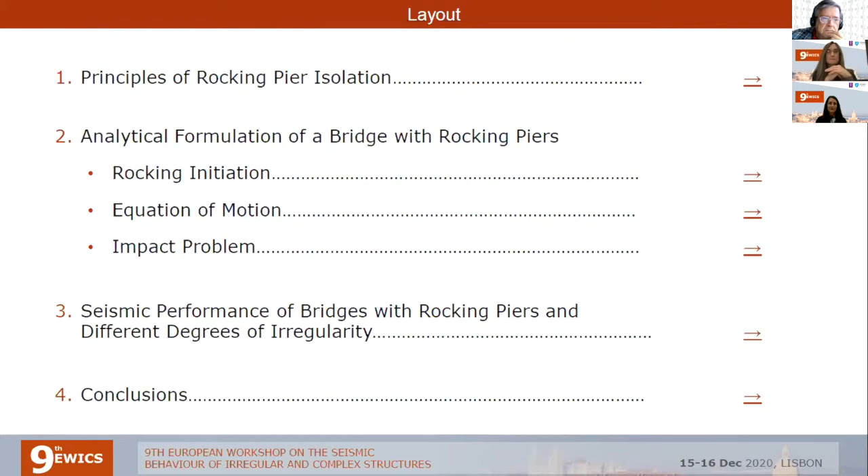To begin with, the concept of rocking pier isolation, although proposed quite recently as a promising alternative for earthquake-resistant bridges, dates back to ancient times, when builders without the ability to construct integral joints used rocking surfaces between adjacent members. Two characteristic examples are Stonehenge in the UK and several ancient temples in the Mediterranean, like the Temple of Apollo in Greece.

The structural advantages of these configurations that allowed them to withstand the test of time are mainly two. The first is their negative stiffness, so in principle resonance is not possible to occur, but practically this is also not feasible to happen, as shown in previous studies. The second is that the restoring mechanisms derive from the physical properties of mass and mass moment of inertia.

From the analytical point of view, the first to examine a rocking structure analytically was Housner in 1963, who examined a freestanding rocking block. Five decades later, Makris and Vassiliou presented the corresponding frame system, a regular rocking frame with columns of same section and height. A few years later, Dimitrakopoulos and Giouvanidis presented the corresponding irregular configuration, consisting of two piers of same section but different height.

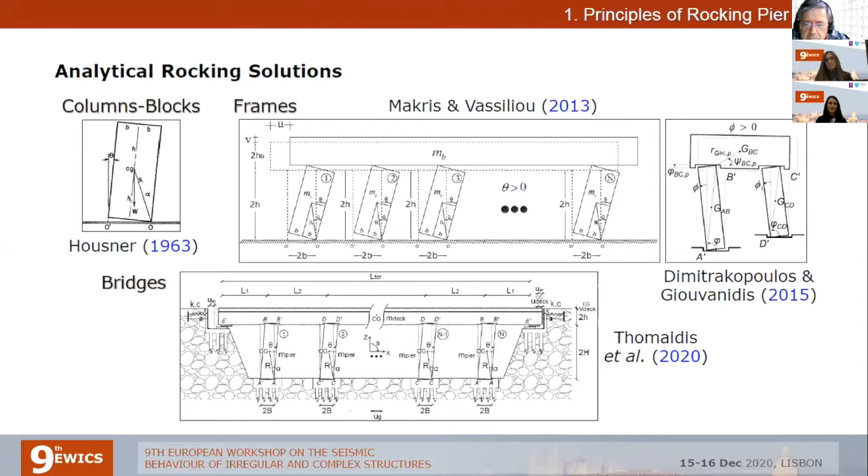Quite recently, we presented the corresponding regular bridge with rocking piers that takes into account the contribution of the abutment backfill system through a spring and dashpot element working in parallel at both ends, as well as additional parameters like the joint gap between the abutment back wall and the superstructure, and different span arrangements for a more realistic bridge configuration.

Today I'm going to present the corresponding irregular system that consists of two rocking piers of same section but different height, and takes into account the effect of the abutment backfill system. In order to formulate the movement of this bridge structure, some assumptions need to be made: first, we ignore the deformability of all structural members, and second, we don't expect sliding effects at any instant.

To describe the rocking motion of this configuration, three conditions need to be described. The first is rocking initiation, or when does the system enter rocking motion. The second is the equation of motion, or what happens as soon as rocking motion has started. The third is the impact problem, describing what happens when the bridge returns to the at-rest position, impacts at the corresponding pivot points, and reverses the rocking rotation to the other direction.

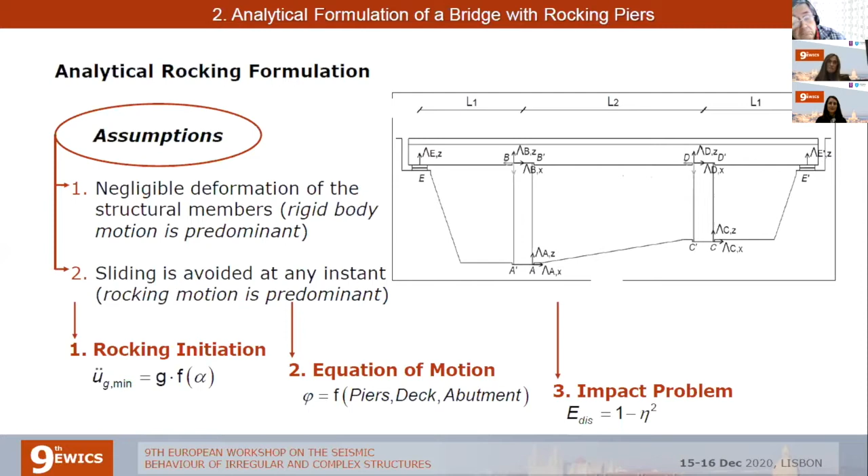In the following slides, I will present these three conditions with emphasis on the difference between the regular bridge structure and the irregular one. For rocking initiation, the application of virtual work results in an equation where the minimum ground acceleration capable of inducing rocking motion equals a constant lambda times the gravitational acceleration times tangent alpha, where alpha is the slenderness of the rocking piers.

For the regular system, lambda is equal to 1, so the expression describing rocking initiation is quite simple. On the other hand, for the irregular system, lambda has a more complex form, and in addition there is a double sign formulation indicating that the ground motion capable of inducing rocking motion needs a different value depending on the direction of the movement.

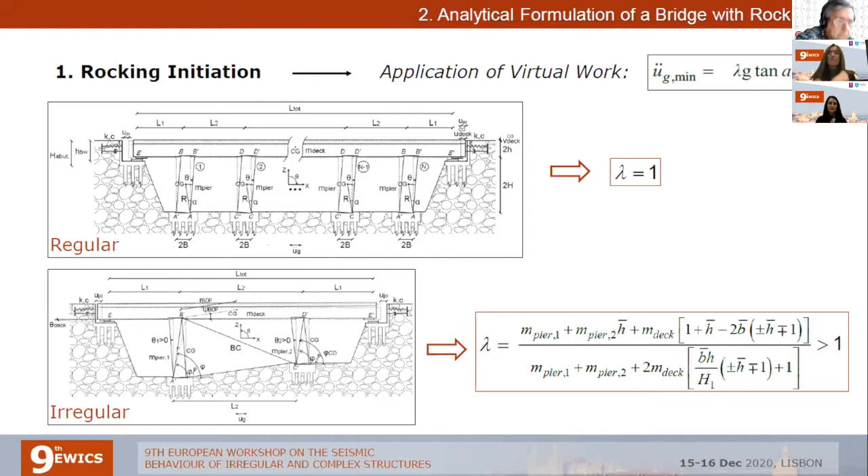On the bright side, though, the equation of lambda for the irregular system is greater than 1. That indicates a delay in the initiation of rocking motion for the irregular structure compared to the regular one.

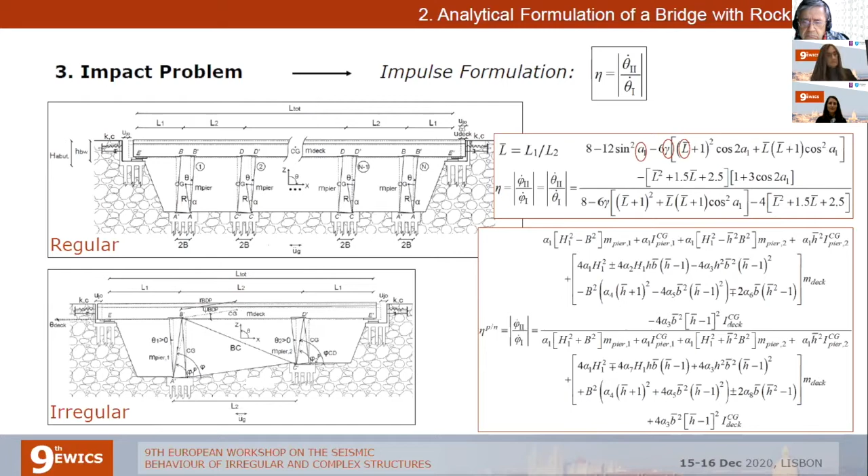On the other hand, the corresponding expression for the irregular system is much more complex, way too long for the system. There is also a double sign formulation which explains different attenuation of motion when the rotation changes from counterclockwise to clockwise and vice versa.

So overall, although the irregular system shows higher complexity in terms of the dynamics, it insinuates from some parameters higher stability, greater seismic performance.

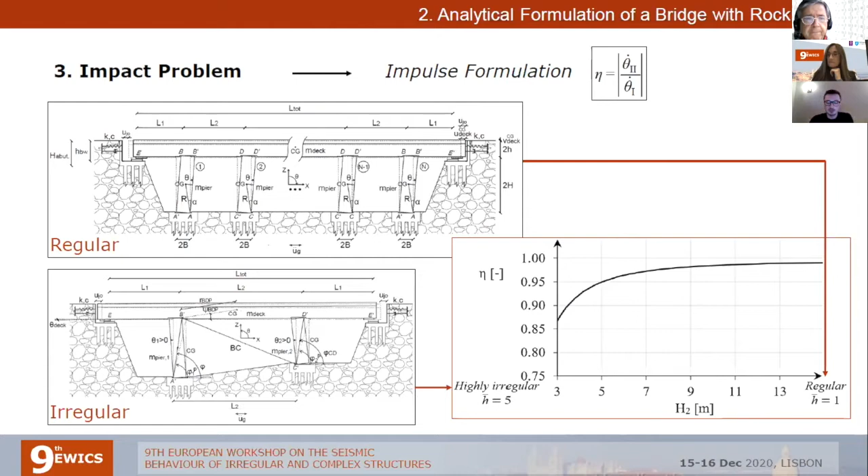Now, the seismic performance is examined with emphasis on different degrees of irregularity. 3 different bridge structures are examined. In all these 3 configurations, the superstructure and the abutment backfill contribution is the same, and we only change the substructure.

Specifically, we examine 2 rocking piers for the regular system with same height of 26 meters, and we decrease the height of one of the 2 piers in order to have a moderately irregular system and a highly irregular system, respectively. The seismic performance is examined with 10 artificial ground motions that match the Eurocode 8 spectrum with PGA 0.6G.

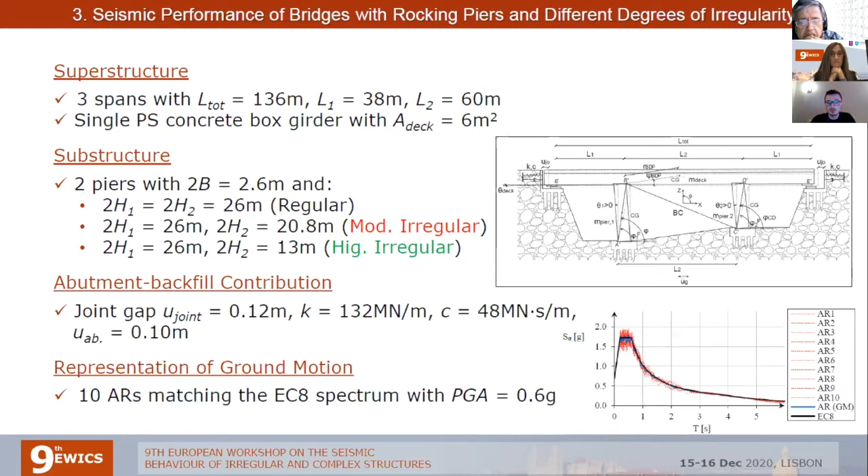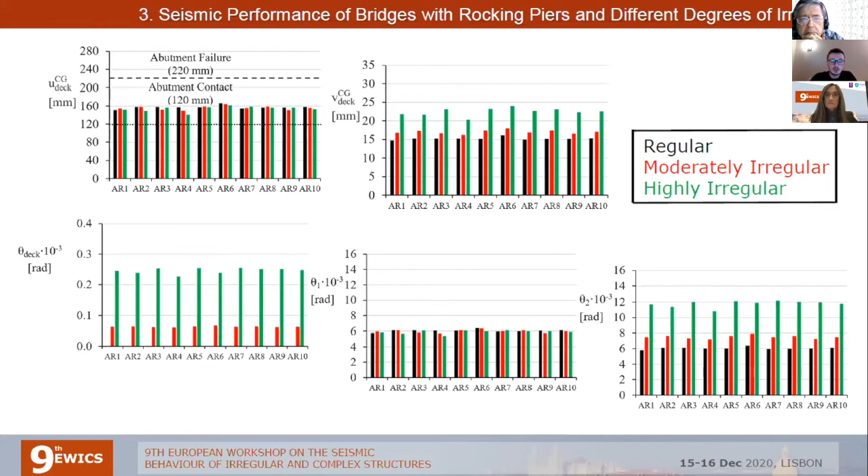To sum up, from the dynamics point of view, the equations are much more complex for the irregular configuration. However, this is not reflected in a corresponding finite element numerical analysis, while the simulation that will be followed will be pretty much the same for a regular and an irregular system.

But the irregular configuration shows delayed rocking initiation, higher contribution of the abutment-backfill system, and higher energy dissipation at its impact at the rocking interfaces.

With respect to the seismic performance, the activation of the predominant failure mode of the system is not affected by irregularity, but the irregular structures experience a different rotation of the rocking piers and different uplift, leading the superstructure to rotate and therefore uplift more compared to a regular system.

To close, it should be noted that all the rocking configurations survived strong ground motions of PGA 0.6G with a reserve capacity of 50%, which is quite high.

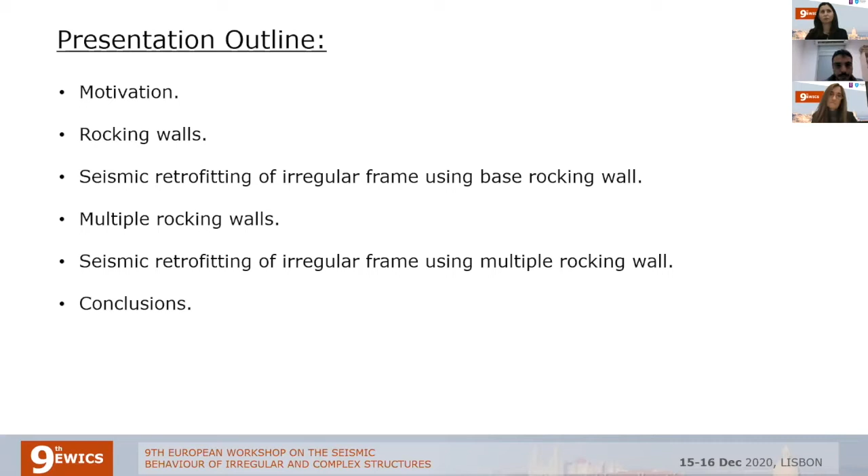Today it's common to design buildings to dissipate seismic energy based on plasticity of the primary structural elements. This plasticity means large damage, which in turn causes a large economic loss after the seismic event.

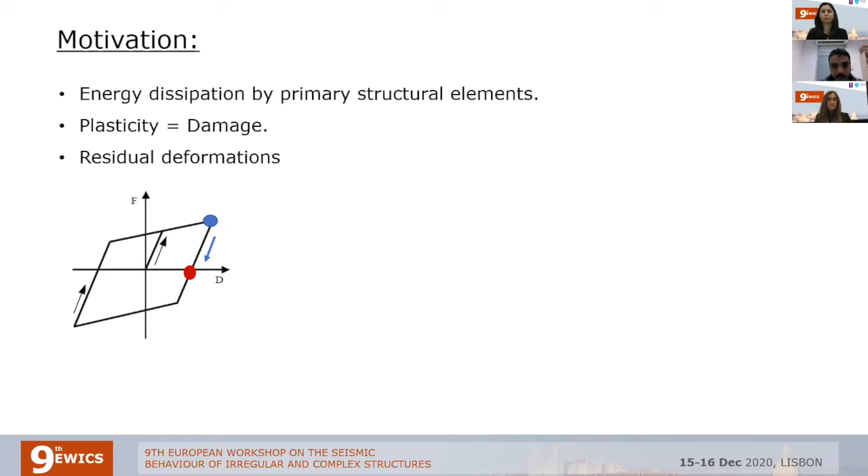If we look at the force deformation curve schematically shown in the figure, we know that if we reach the plastic deformation, then removing the load will cause large residual deformations. The problem with these large residual deformations is that they are very hard to fix, and sometimes it's impossible or economically prohibitive.

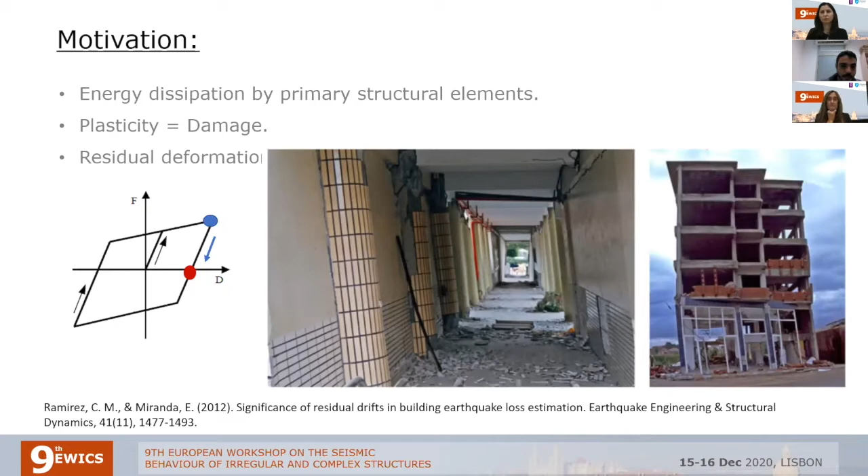So to solve these problems, self-centering systems were proposed. The advantage of these systems is that they can significantly reduce the residual deformations. In addition, they can be designed such that the energy dissipation is achieved by designing special devices that are located in previously known locations in the structural system.

The force deformation behavior of these systems is referred to as flag-shaped behavior, shown schematically in the figure. The special thing with this force deformation curve is that it passes through the origin, or in other words, zero force gives zero displacement.

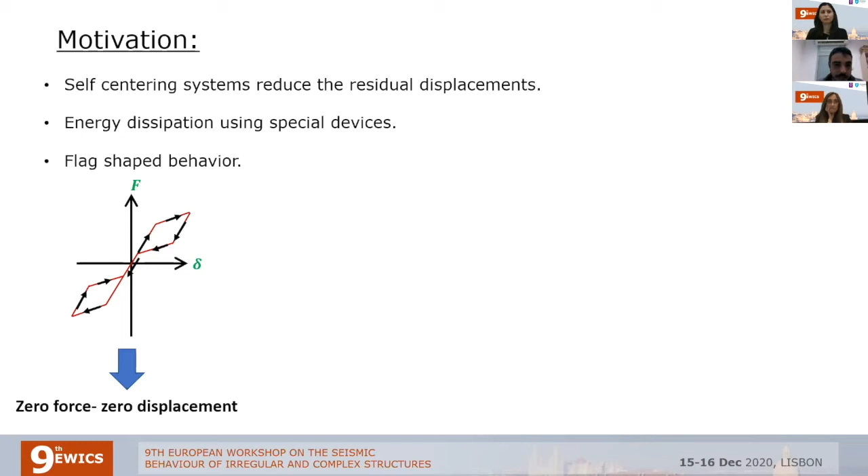Several types of systems were proposed to achieve this type of behavior. This includes rocking walls or rocking concentrically braced frames, which at the macro level behave the same, post-tensioned frames, and systems that use special self-centering devices.

The advantage of a rocking wall is that it has a large lateral stiffness, which for irregular or frame structures helps to regulate the interstory drift along with the building height.

The concept of rocking walls: if we look at the behavior, it's a combination of two behaviors. The first one is the rocking itself plus the pre-stressing tendon, which gives elastic nonlinear behavior.

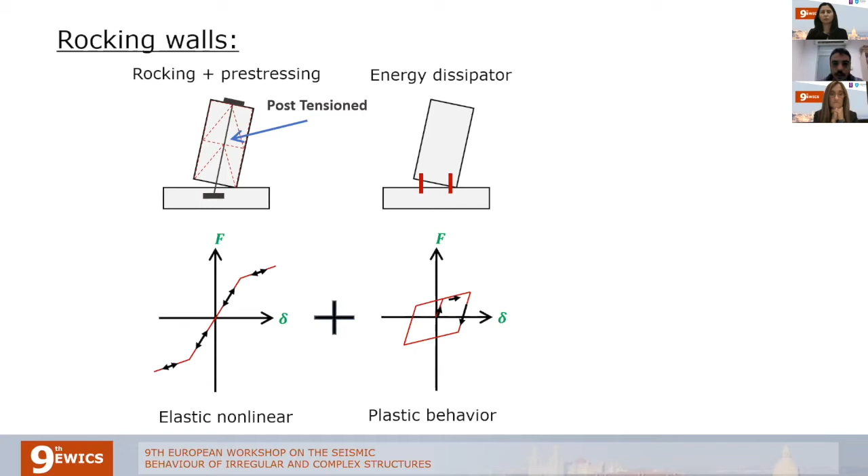We add to this energy dissipation from the energy dissipation device. If we combine these two behaviors and tune them correctly, we can potentially achieve the desired flag-shaped behavior.

In this study, we will use a rocking wall in order to retrofit an irregular steel moment resisting frame. Then we will add the multiple rocking solution in order to reduce the demands on the rocking system.

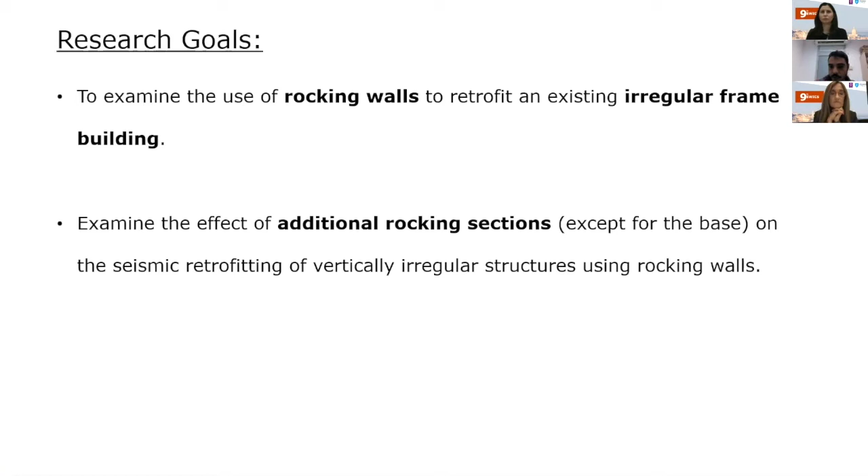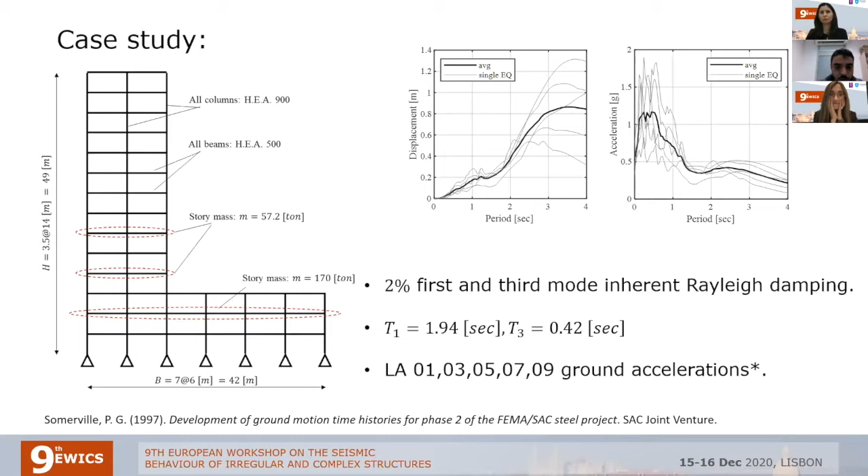The first natural period of the structure is 1.94. The analysis of the frame was conducted using the finite element software OpenSees, using nonlinear beam and column elements modeled with the fiber element section method with 5 integration points along each member. P-delta effects were also considered, along with elastoplastic behavior with 0.5% hardening.

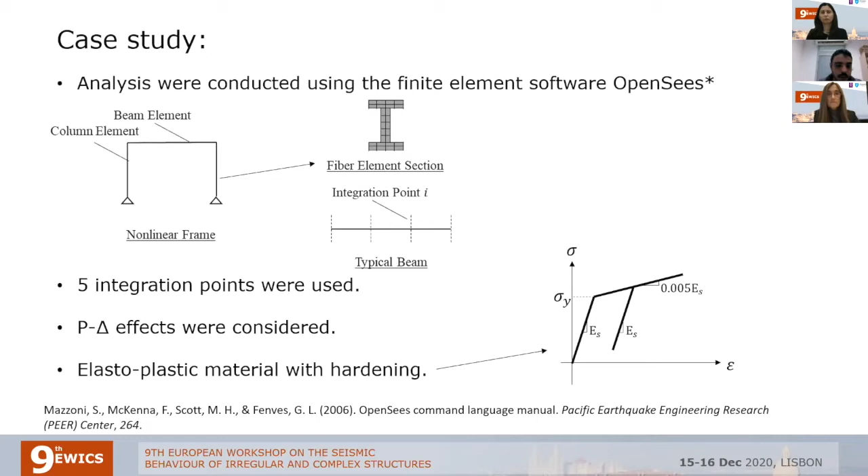The bare frame results show large interstory drifts, presented here along the building height. Each gray line represents the results for a single earthquake, and the average is represented by the black line. The red dashed line represents the setback level.

In addition, if we look at the roof displacement, we can see that the residual displacements in this case are about 30 centimeters, giving an inclination angle of 0.006 or more, where previous studies have defined an allowed inclination of 0.005.

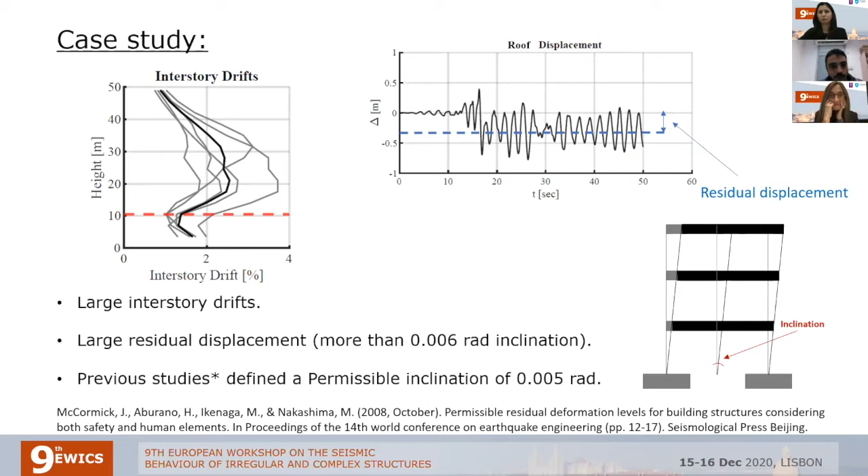So in order to reduce these residual displacements and interstory drifts, we have added a rocking section to this frame. The rocking section of the rocking wall was designed using a reduction factor of approximately 6. Other reduction factors were considered, but this value gave the best results in terms of residual deformations.

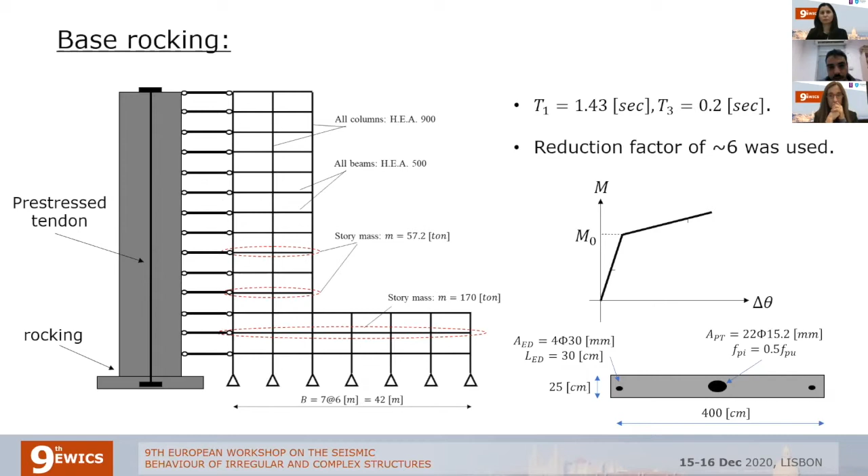The natural period of the building slightly decreased because we added stiffness to the building. The model of the rocking wall is presented here in the figure.

The results of the structure retrofitted with a base rocking wall are presented here in this slide.

The left figure shows that the interstory drifts were highly regulated along with the building height, and they are significantly reduced. The middle figure shows a reduction in the residual displacements. There are still some residual displacements which are caused by the nonlinearity of the existing frame itself.

The right figure here shows the peak moments at each section of the added rocking wall, and we see that these moment demands can be large along with the structure height. So we are interested to reduce this moment envelope.

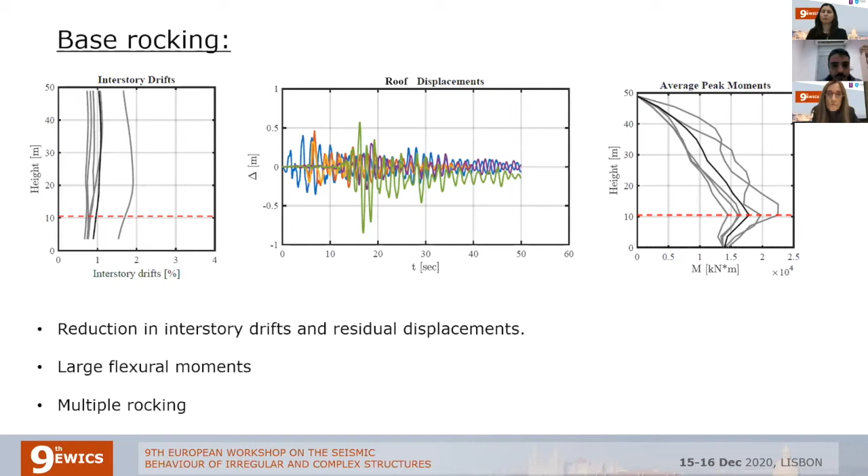So if we add another rocking section along with the building height, additional to the one located at the base, we can reduce this moment design envelope. And with this, we get increased interstory drifts.

So to design this type of system in order to retrofit our irregular frame, we ask ourselves where to locate the additional rocking section, and in addition, which decomposition moment to design for. The decomposition moment is the moment at which the rocking behavior starts.

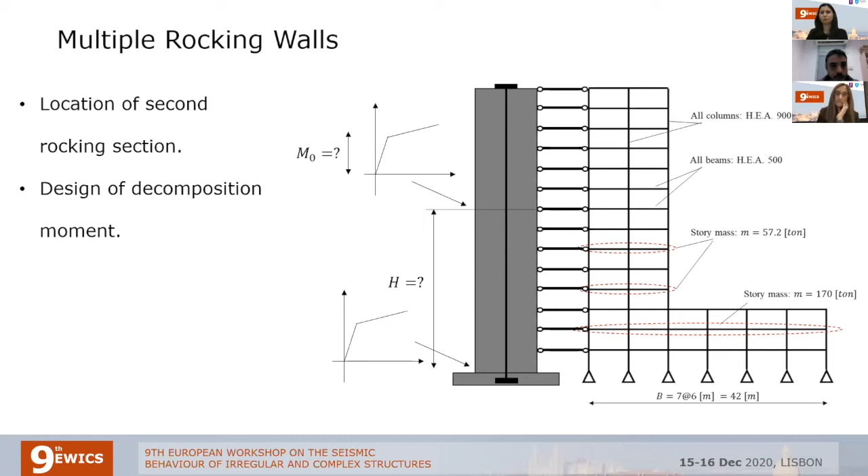So we have conducted a parametric study where each combination of these two parameters was subjected to nonlinear time history analysis, as explained before, and the results are presented here in the contour maps.

The left figure here shows the maximum interstory drifts of the multiple rocking system normalized with the bare frame. Just for reference, the results for the base rocking system show a value of 0.43, which says that the multiple rocking solution always increases the displacement as we expected before.

The vertical axis here represents the additional rocking level, and the black line represents the setback level of the building. The horizontal axis represents the ratio between the top to base decomposition moments. The right figure shows the volume of the moment envelope.

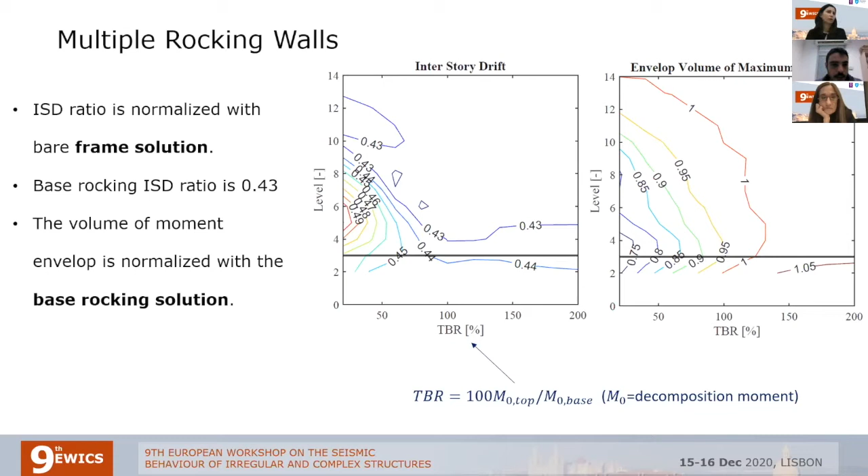And we have selected the marked point here to examine the behavior of this system. This point represents a rocking wall with two rocking sections, where the second one is located at the setback level, or at the third level of the structure.

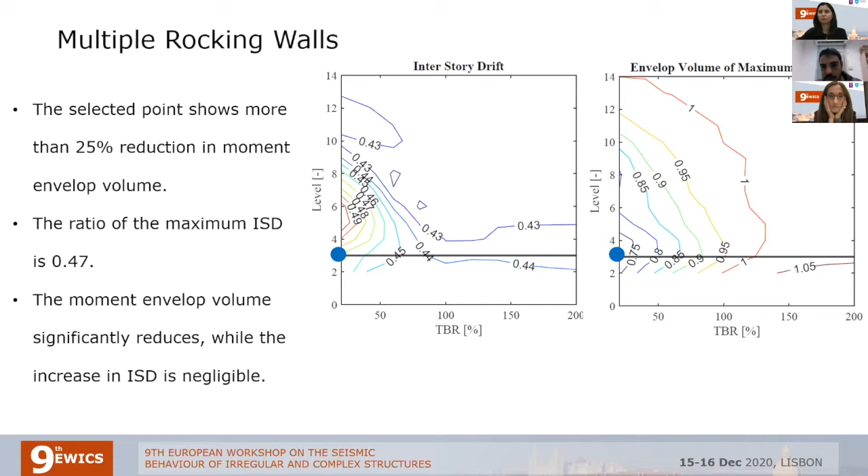As we see here, the reduction in the moment envelope volume, shown in the right figure, can be significantly reduced, while the interstory drifts, as we see in the left figure, are slightly increased.

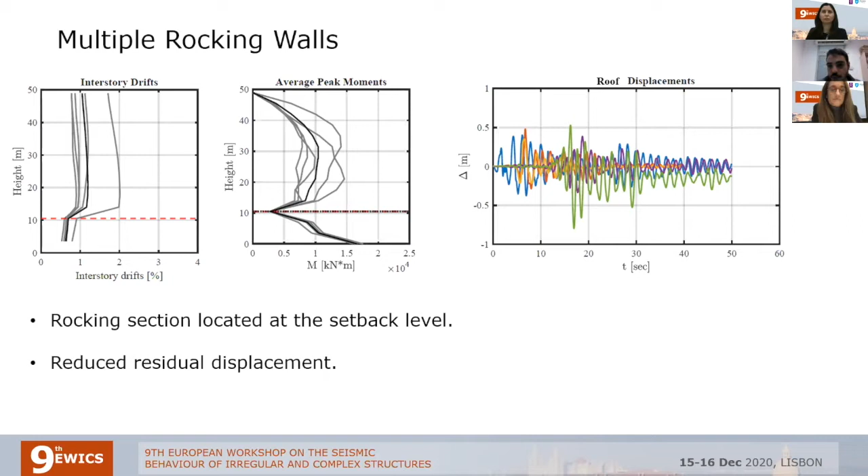The response of the selected points is shown here for interstory drifts, average peak moments, and roof displacements. What's interesting here is that the roof displacements, the residual deformations, are similar to those received with the base rocking solution.

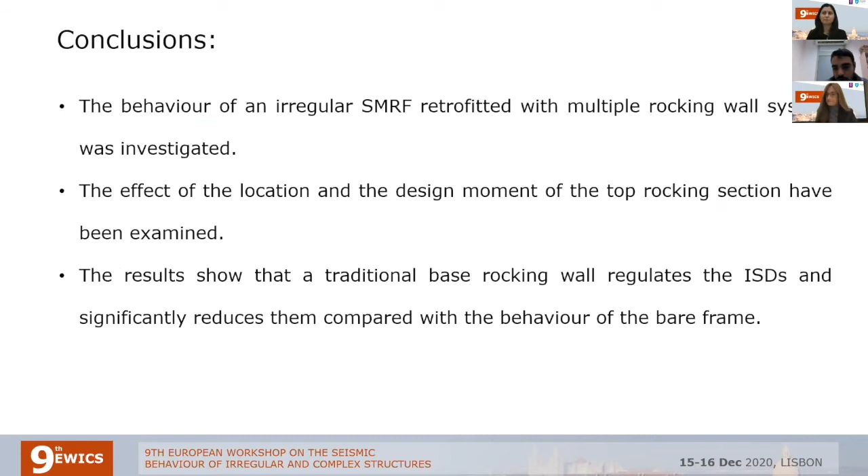So to conclude, the behavior of an irregular steel moment resisting frame with a multiple rocking wall system was investigated. The effect of the location and design moment of the top rocking section have been examined. The results show that a traditional base rocking solution regulates the interstory drifts and reduces them, and adding a rocking section at a higher level could potentially reduce the bending moment envelope.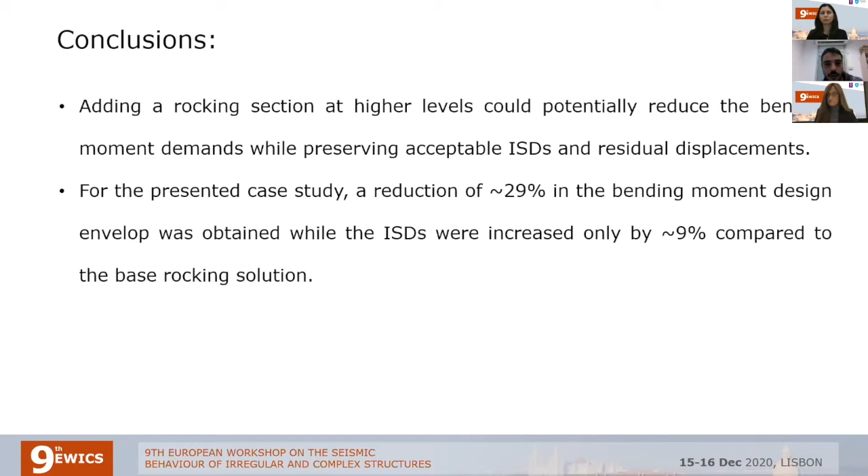In the presented case study, a reduction of approximately 29% in the bending moment design envelope was achieved, while the interstory drifts were increased by just approximately 9%. Thank you for your attention.

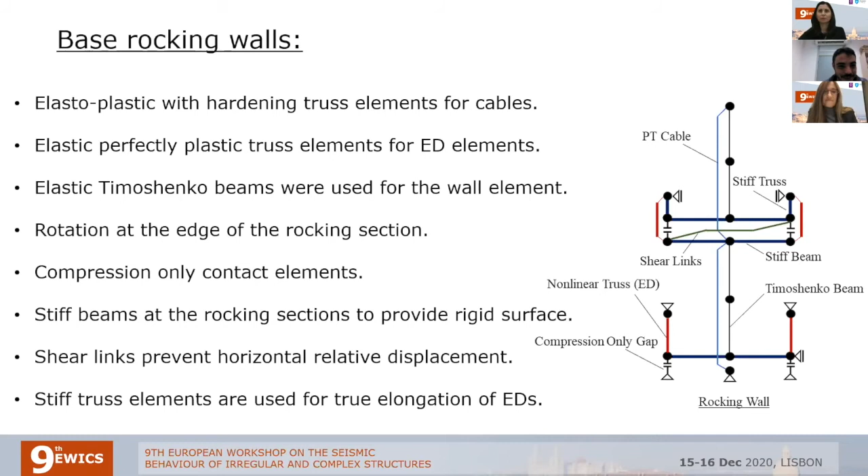I'm going to present the work of our master student, Seismic Retrofitting of Irregular Mixed Masonry Reinforced Concrete Buildings in Lisbon. There are four types of old masonry buildings in Lisbon: pre-pombalino, pombalino, gaioleiro, and mixed masonry reinforced concrete buildings, which will be the case study I'm going to present now.

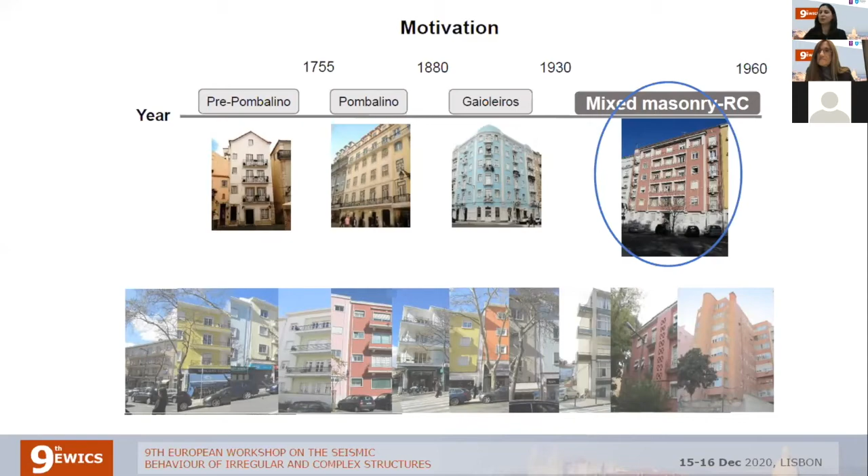As we can see here, this is the area where these buildings are located in Lisbon. The area is called Alvalade, and it represents 62% of the building stock in Lisbon of all masonry buildings. In these buildings, reinforced concrete was introduced for the first time. And then, as all old masonry buildings, they were built without using any seismic code.

After some analysis, we concluded that they have a high level of degradation and deterioration of structural materials, and due to the fact they're still used for housing and services, some seismic risk analysis at the territorial scale should be performed, and eventually after that, some appropriate strengthening techniques should be proposed.

In total, there are around 1,300 mixed masonry reinforced concrete buildings in this Alvalade neighborhood. We analyzed about 43.3%. And after analysis, we concluded that they have very low resistance to seismic action, and most of them show heavy or very heavy damage.

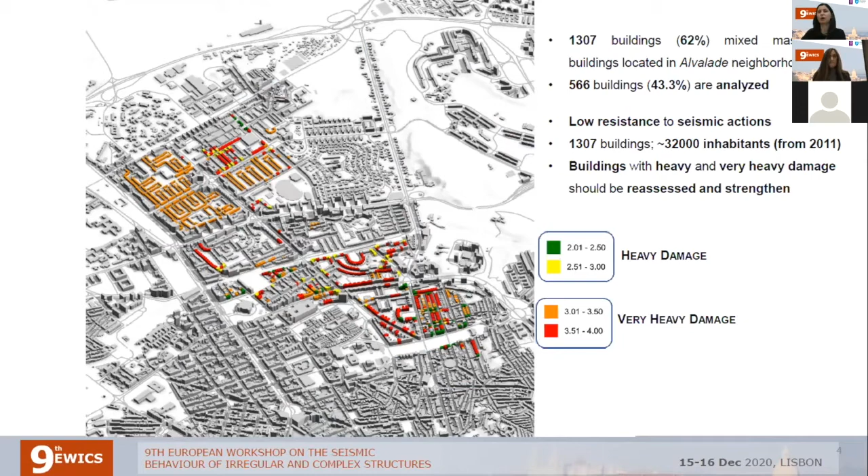We chose to analyze the most representative buildings of this typology, analyzing buildings located in aggregate due to the fact that this is a more realistic case than analyzing only isolated buildings. These buildings have irregularities in plan and height.

They have 4 levels. External walls are built with reinforced concrete structures filled with bricks. Internal walls have solid and hollow brick with cement mortar. Facade and interior walls, as I already told, have different thickness along the height of the building.

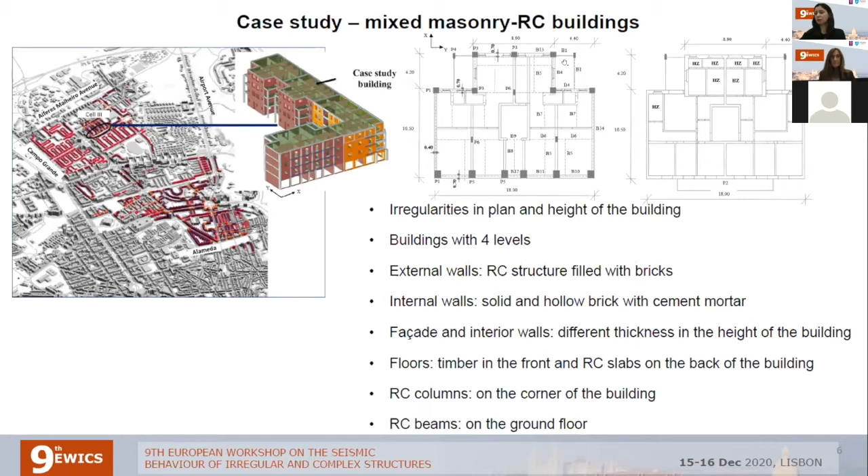This building has 2 types of floors: a timber floor in the front of the building, and reinforced concrete slab on the back. Also, they have reinforced concrete elements on the corner of the building and along front and back facade, and reinforced concrete beams on the ground floor.

We performed non-linear static analysis, and the numerical model was defined in Tremuri program based on equivalent frame model approach. In this case, we analyzed only assessment of the global seismic response because we suppose that reinforced concrete ring beams, which exist in these buildings, prevent local response, but this should be analyzed in the future.

Walls are discretized by a set of panels, piers and spandrels, and non-linear response of masonry panels were modeled by non-linear beams with multilinear constitutive law. Reinforced concrete elements are modeled with non-linear beams with strength criteria according to Eurocode 8 and Italian code, and floors were modeled as anisotropic membrane finite elements.

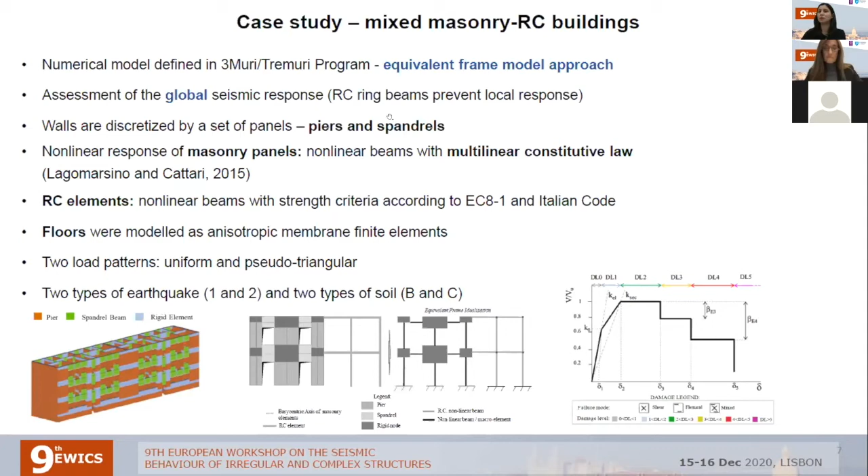We consider 2 load patterns, uniform and pseudo-triangular, and 2 types of earthquakes, as suggested in the Portuguese National Code, and 2 types of soil, B and C, since these buildings are located in these 2 types of soil.

Target displacement of structure is computed from the intersection between the capacity curve and response spectrum that represents the seismic action. Seismic demand for Lisbon is defined with a 475 year return period, and structural safety is verified when the ratio between ultimate and target displacement is higher than 1.

As you can see here on this graphic, for the y direction and uniform load pattern, this criteria was not satisfied. So some strengthening techniques should be proposed.

Here I have presented some damage patterns where we can see that in masonry piers we have mainly flexural damage, and in masonry spandrels we have shear damage. Also for reinforced concrete columns we have flexural damage, and shear damage for reinforced concrete beams, with damage level mainly between 2 and 3, and 3 and 4 in masonry elements.

In this graphic, we can see that the global behavior of the building is influenced by the pushover curve from the walls on the back of the building. This is due to the irregularity of this building on the back, due to some torsional effect.

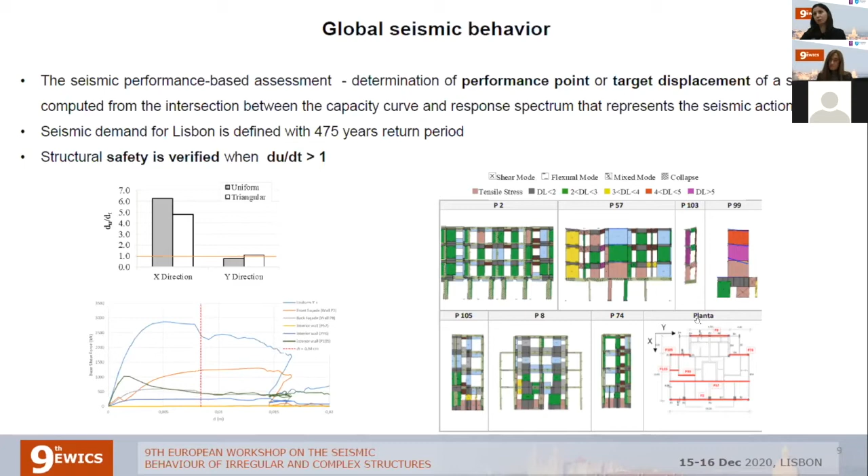After analyzing this pattern and after we saw that criteria are not satisfied, we propose some strengthening techniques. In total, we proposed 12 retrofit scenarios. I'm going to present 4, which are the most relevant and effective.

One of them was strengthening with carbon fiber mesh applied on both facade and some interior walls where extensive damage was observed, mainly at damage level higher than 3. Then strengthening of the staircases with carbon fiber mesh, while keeping reinforcement of the facades.

In terms of reinforced concrete elements, we performed strengthening of the corner columns and columns at the ground level of the main facade with metal angles, and the most damaged beams at the ground level with metal sheets, and strengthening of the columns and beams on the ground floor by

carbon fiber sheet confinement. In all scenarios, we made connection between walls, interior and exterior, due to the fact that this building has very bad connection between these walls.

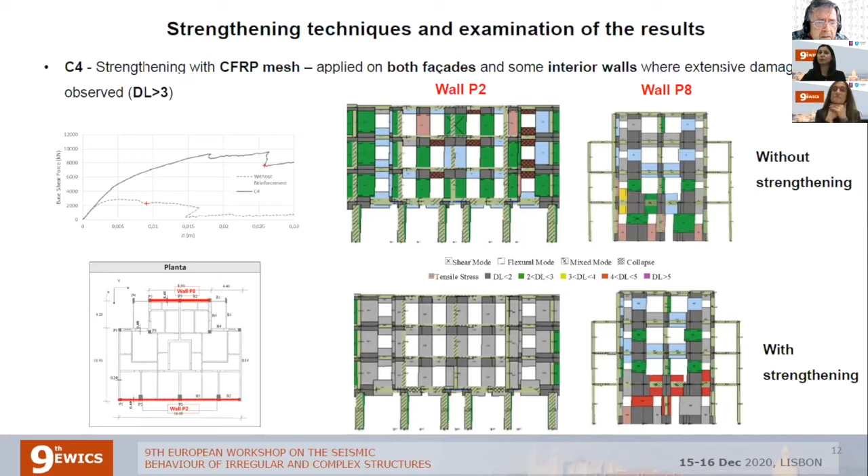This is the strengthening technique applied on both facade and some interior walls, carbon fiber mesh. As we can see, we were fully able to remove damage from the masonry piers, and also from reinforced concrete for some upper floors. But we can see here that with this strengthening we have some very extensive damage on the back facade of the building. This is actually caused by torsional effect due to the irregularity of the building, and due to the fact that we put reinforcement on the main facade, increasing its resistance, causing this effect.

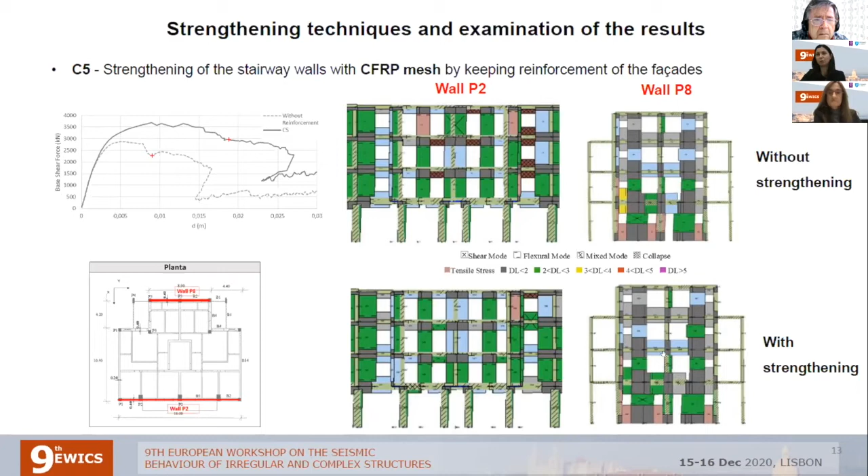Then we decided to strengthen these staircases with carbon fiber mesh, but also keeping the reinforcement of the facade. In this case, as we can see, we managed to solve these problems. We don't have this extensive damage anymore. We have damage between 2 and 3.

The next strengthening technique we perform on reinforced concrete elements is metal angles on the most damaged columns and metal sheets on the most damaged reinforced concrete beams. Here we can see that we managed to solve the problem on some reinforced concrete columns on the ground floor and also on the upper floors.

Also here we had shear damage for this wall P8 on the back of the building. Now we managed to solve this. We don't have any more.

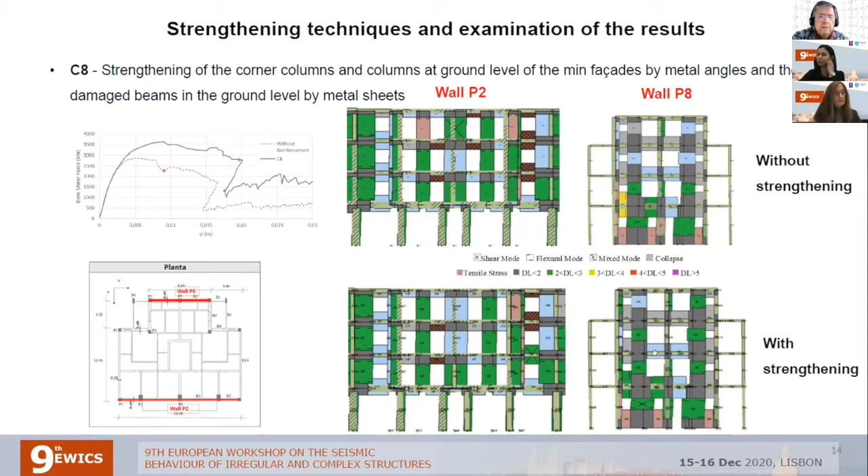Just a short conclusion: after applying all these reinforcement techniques, overall structural safety of the building was always satisfied, avoiding the global collapse of the structure. The observed damage level was always mitigated.

The recommended solution always depends on a cost-benefit analysis, which we are going to do for the research in the future. One of the most appropriate recommendations should target the minimization of torsional effects due to the irregularities found in the back facade.

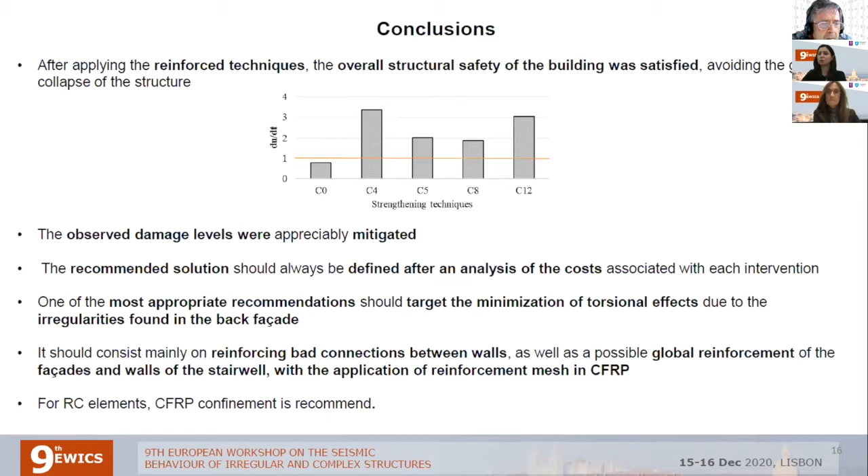It should mainly consist of reinforcing the connection between walls, which is really important, as well as possible reinforcement of the facades and walls of the staircases. In terms of reinforced concrete elements, confinement with carbon fiber sheets is recommended.

Thank you very much for your attention.

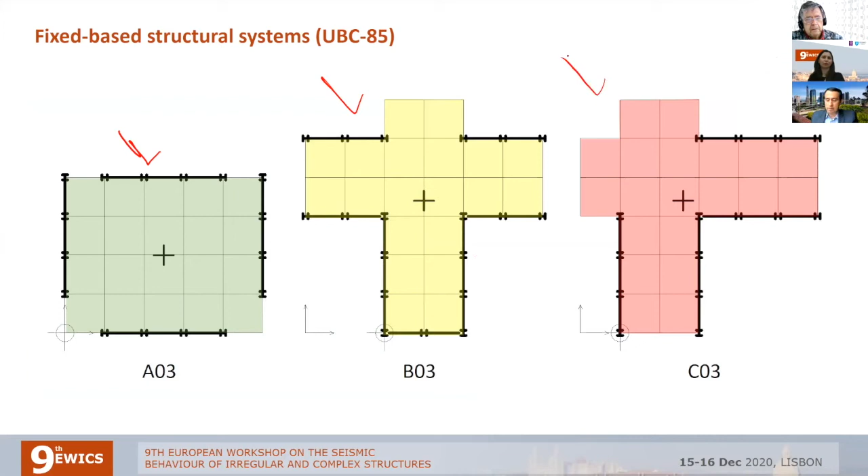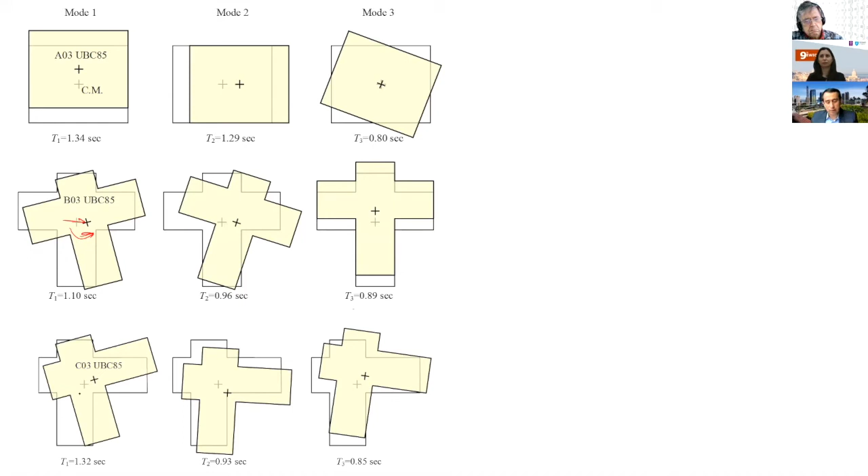As expected, the first mode of the rectangular plan is in the main directions of the building, but for the other plans, the first mode shows some coupling between torsion and translation in the horizontal direction. For the other building plan, we have coupling in both the X and Y directions with torsion.

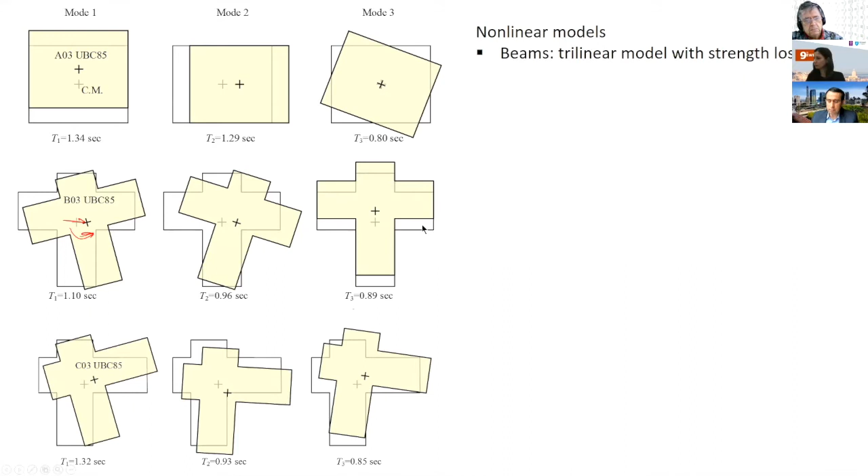The nonlinear model we built for these buildings was based on a trilinear model with strength loss for the beams. For the columns, we use PMM interaction using plasticity theory. Since these are steel buildings, we also need to model the panel zones at the intersection between beams and columns using trilinear models with strength loss.

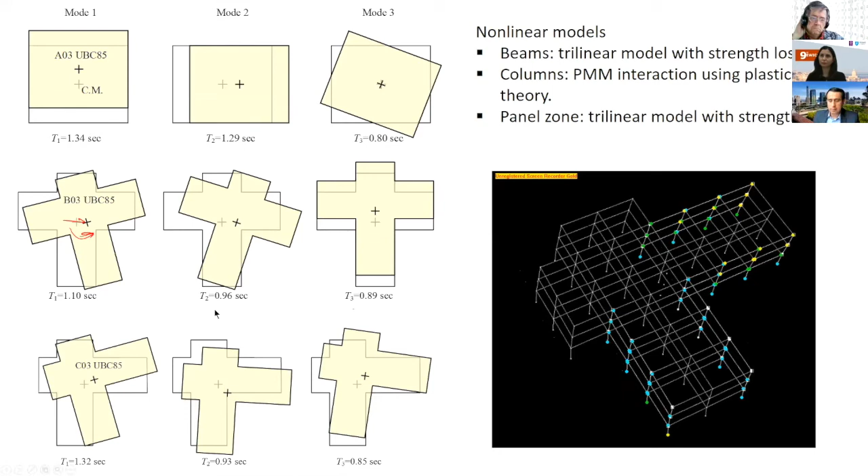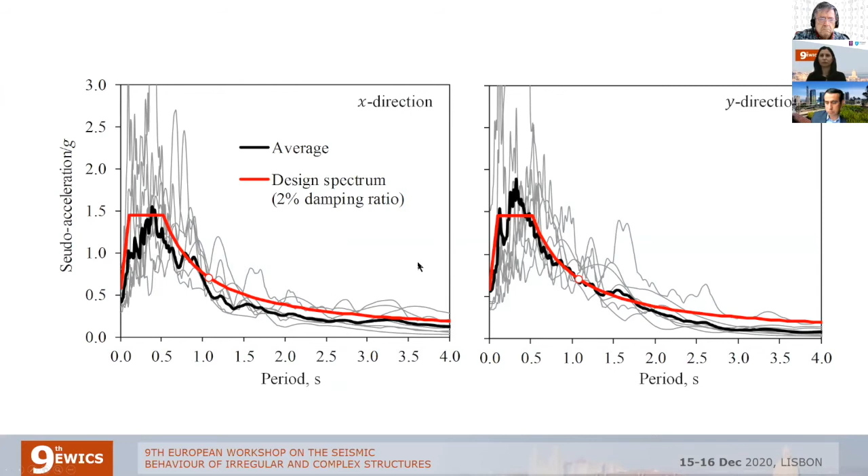So then we designed the isolated building. The design was based as a retrofit, since we want to retrofit these buildings that were designed with an old code using this technique.

For the building, the final devices had 50 centimeters of diameter. The thickness of rubber were 12 layers, totaling 20 centimeters. Period of the isolated building is 2.6 seconds, and the bearing displacement is 0.30 for the design spectrum shown before. For this design, we did the design for a base shear ratio, base shear between the fixed base and the isolated, of between 3 and 4.

This is important because later I'm going to show that the effectiveness of the system is going to be decreased because of the highly irregular plan that this building had.

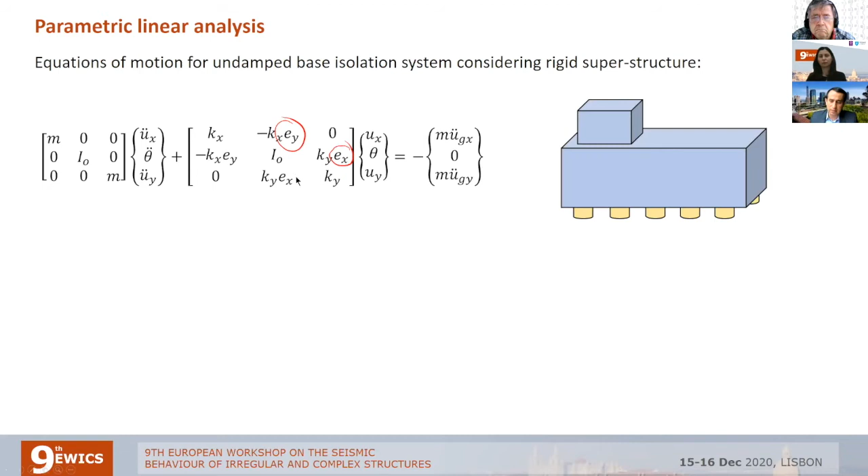These eccentricities are usually equal to zero for a regular plan building, but for a highly irregular plan building like these ones, we could eventually have some isolators with larger stiffness so we can generate some kind of eccentricity to compensate for the torsional behavior of the building. So this is kind of the model we did first, very simple.

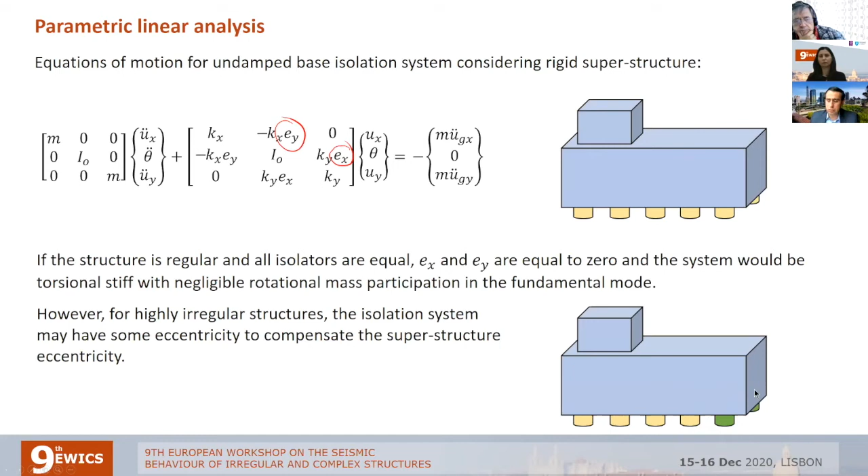So for regular buildings, these eccentricities are zero. For highly irregular buildings, we try to compensate the torsion of the superstructure using different stiffness for the isolators at the base, so we can get an optimum eccentricity.

But when you try to do this in practice, it's kind of difficult. So to make this simpler, we decided to use all the isolators equal in all the columns of the building.

So here I'm comparing the response of the base isolated building with the response of the fixed base building. In this video, you can see that the fixed base building has a lot of very high velocities and high displacements, and the isolation system reduces those along with the damage of the building, but still you see some vibrations in higher frequencies.

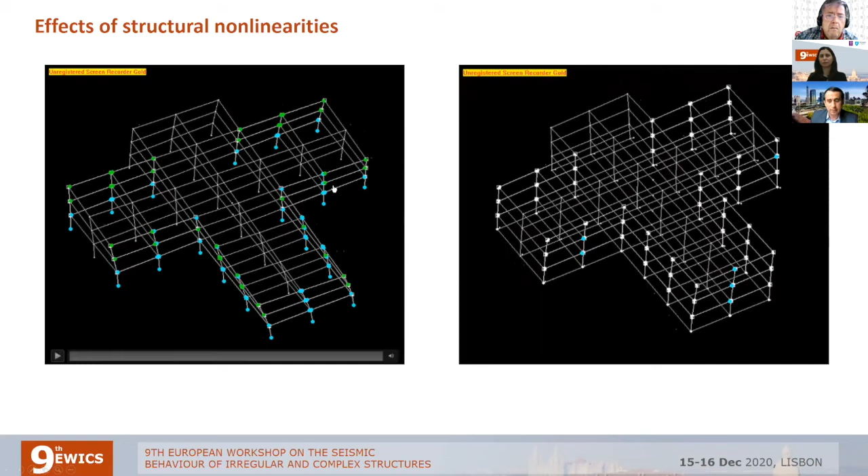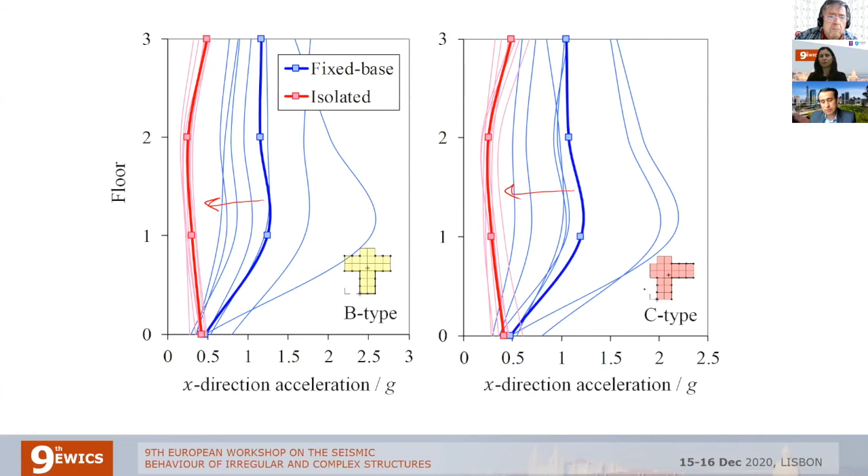Those are due to higher mode effects. The first mode is treated very well by the isolation system, but the higher modes may have some problems. So here I'm plotting the fixed base and isolated systems to see the reduction in acceleration for both buildings, the B and C types. However, the C type seems not as effective as the B type building in reducing accelerations.

Story drifts are also reduced, but for the C-type building, the reduction is not as high as you can observe here for the B-type building. The base shear ratio intended in the design was from 3 to 4, but here you see ratios of 2—smaller than intended from the design—because in the design, you usually do a very simplistic model of the building.

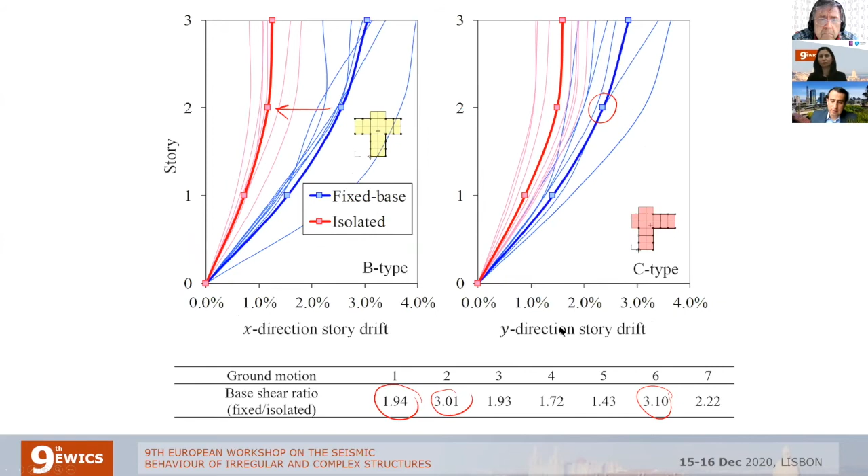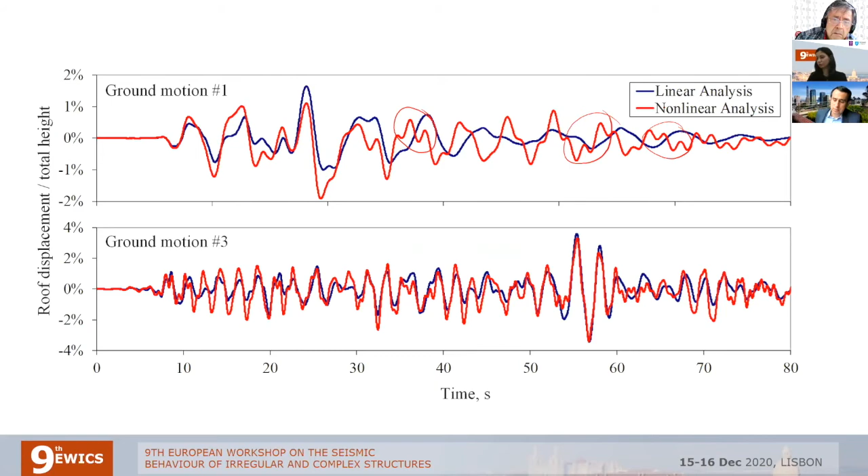So in conclusion, using similar isolators for all columns of an asymmetric plan building reduces but not eliminates torsional behavior of the structure, leaving some residual torsion that gets amplified by higher mode effects and nonlinearity of the superstructure. Also, because of this, the effectiveness of the isolation system may be reduced significantly for highly asymmetric plan buildings. So that's something we should take into account—the system works very well, but it's not as effective as if the building were regular.

Finally, this is just something we observed in the modeling we were doing: the flexural stiffness of the first story beams, meaning the floor just below the columns, has an important effect on the magnitude of story drift of isolated buildings. This beam should be as rigid as possible to neglect rotation of the columns at the base, because if they rotate, then drift is not reduced as expected from the isolation system.

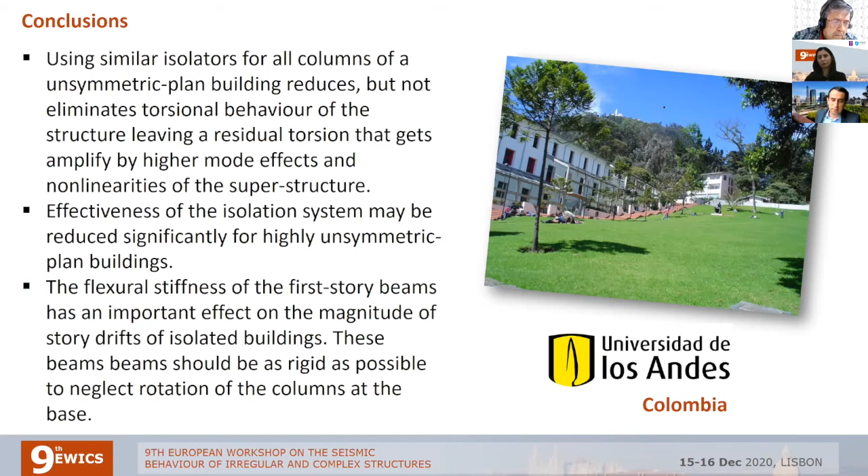Thank you very much for your attention. These are some pictures of my university here in Colombia. Hopefully someday I could go again.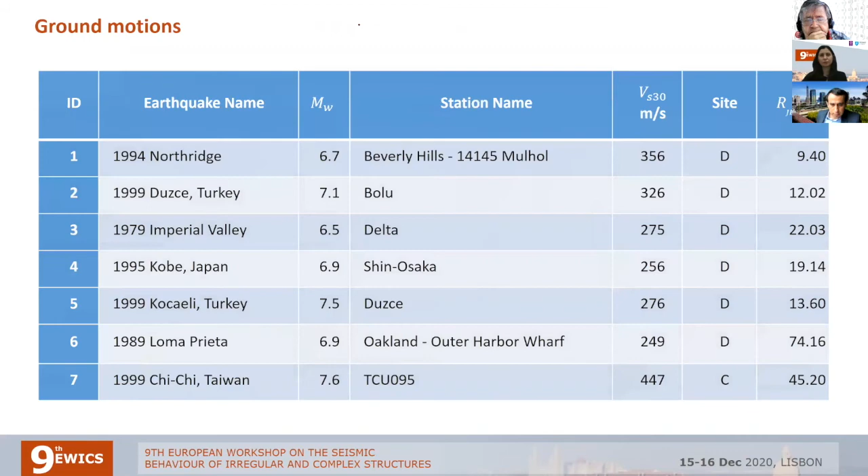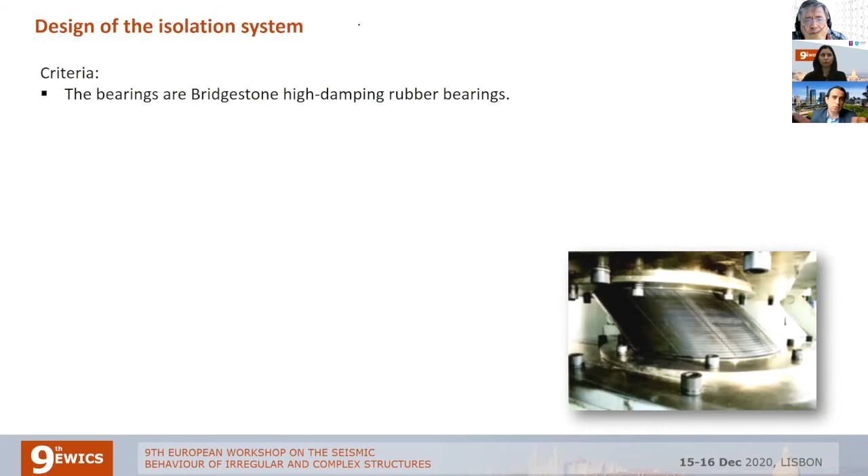Yeah, damping was considered in the isolation system, as you remember when I was mentioning the criteria. We used Bridgestone high damping rubber bearings. The model for the bearings was initially a trilinear model, so the area inside the cycle is related to the damping. We tried to calibrate the computer model to reflect results available for this kind of rubber from the fabricator. So yes, it was considered—just within the model, not as a target value we wanted to achieve. It was considered with the bearings designed mainly based on displacements, following the criteria I presented.

Okay, so it was also evenly distributed between the isolators, because they were all the same, right? Yeah, exactly. This may also have an effect that's worth investigating. Okay, yes. Thank you. Thank you.

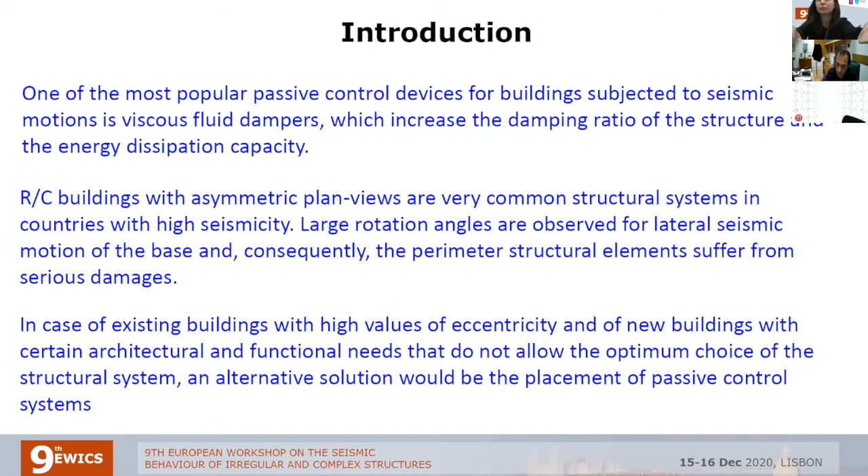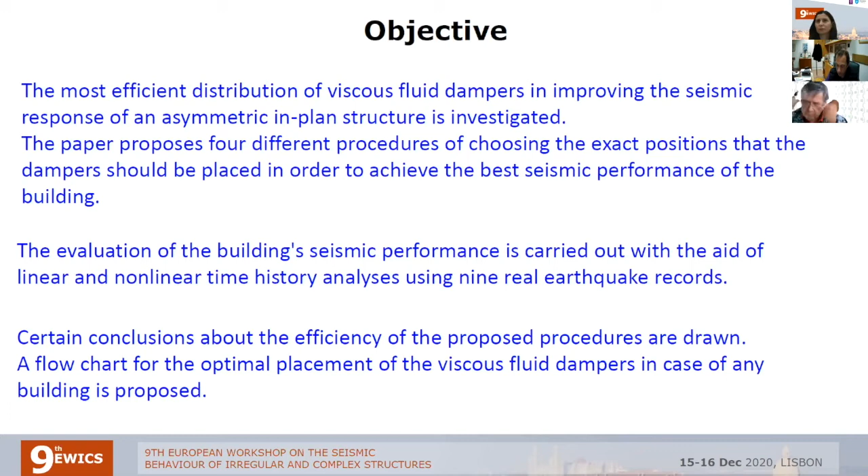The present paper examines the appropriate distribution of viscous fluid dampers in order to improve the seismic performance of a structure with asymmetric plan view. To achieve this goal, a multi-story building with fluid viscous dampers of certain viscosity is considered. Four different procedures of choosing the exact positions that the dampers should be placed in order to achieve the best seismic performance of the building are proposed. The evaluation of the building's seismic performance is carried out with the aid of linear as well as non-linear time history analysis using nine real strong ground motions, and certain conclusions about the efficiency of the proposed procedures are drawn. Moreover, a flow chart for the optimum placement of the viscous fluid dampers in case of any building is proposed.

The function of fluid viscous dampers is based on the principle of energy dissipation due to the flow of fluid through orifices. This way, these devices convert the kinetic energy of seismic vibration into heat, which is then dissipated into the air. The typical form of a fluid damper is shown in the figure. The activation of the dampers depends on the relative velocity between...

Can you please increase the volume, it's hard to hear. Yes, okay, I'll come. I will speak louder.

The activation of the dampers depends on the relative velocity between the two endpoints of the device. The forces applied by the dampers to the structure are determined by the placement of the devices throughout the building. Several different approaches have been developed for the efficient distribution of the dampers.

The basic idea adopted by most of them is the placement of the dampers diagonally between the stories, so that the edges of the devices move due to the stories' relative displacements, or drifts, during seismic motion. This approach has been proven effective in typical frame buildings.

The function of the viscous dampers can be described by the expression shown in the slide, where i denotes the eigenmode used for the calculation of the dampers' parameters.

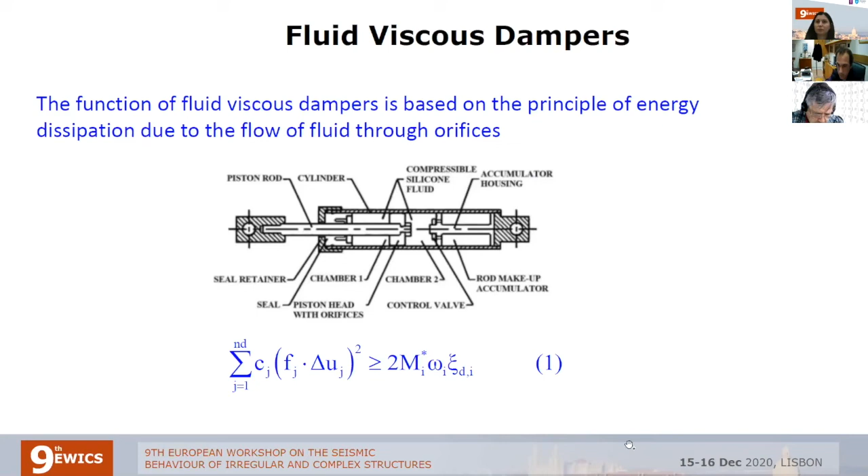A 5-story reinforced concrete building with an asymmetric plan view has been chosen. The plan view of the typical building story, as well as the dimensions of the structural elements, are shown in the figure. The design data of the investigated building are presented in your slide.

The building was first analyzed and designed by means of modal response spectrum analysis as defined in Eurocode 8. Then, the non-linear behavior of the structural elements was modeled using plastic hinges located at the column and beam ends, as well as at the base of the walls.

The assessment of the building's seismic performance was carried out with the aid of linear and non-linear time history analysis using 9 real strong motion pairs of horizontal bidirectional earthquake ground motions. The earthquake records were selected from worldwide well-known sites characterized by strong seismic activity, and the selected ground motions are far-fault records recorded on soil type B.

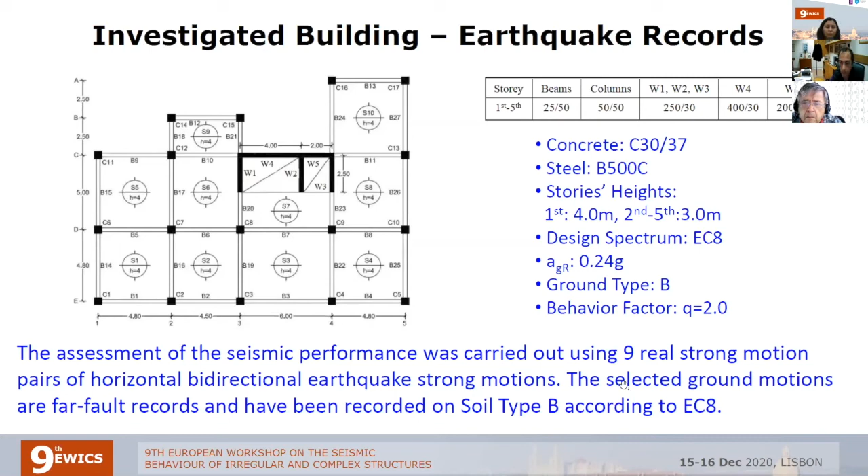Four different procedures of choosing the exact positions where the dampers should be placed are proposed. The common choices made for all the procedures are the following.

The dampers are placed only along the perimeter frames of the building, so there are 75 different possible locations along the building's height where they can be placed.

A total number of 24 dampers has been chosen, since the analysis revealed that this number of dampers leads to a critical damping ratio associated with the viscous dissipation of approximately 20%, which was set as a target value.

The viscosity of the dampers has been considered to be the same for all of them, equal to 2000, which is the typical value for this kind of device.

The four procedures of choosing the positions of the dampers are the following. According to the first procedure, the viscous damping of each damper was computed using equation 1 and the results from the first eigenmode. The 24 dampers with the larger damping ratio were selected.

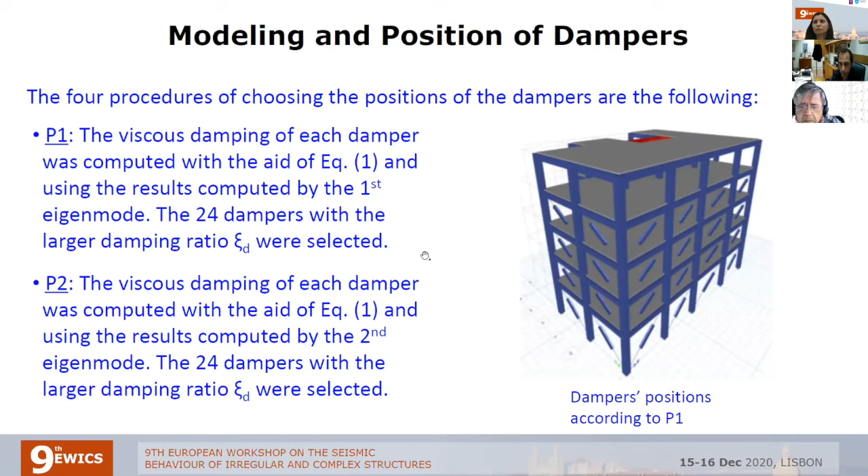According to procedure 2, the viscous damping of each damper was computed using equation 1 and the results from the second eigenmode. The 24 dampers with the larger damping ratio were selected. The figure shows the dampers' positions according to procedure 1.

According to procedure 3, the 12 dampers with the largest damping ratio according to procedure 1 and the 12 dampers with the largest damping ratio according to procedure 2 were selected.

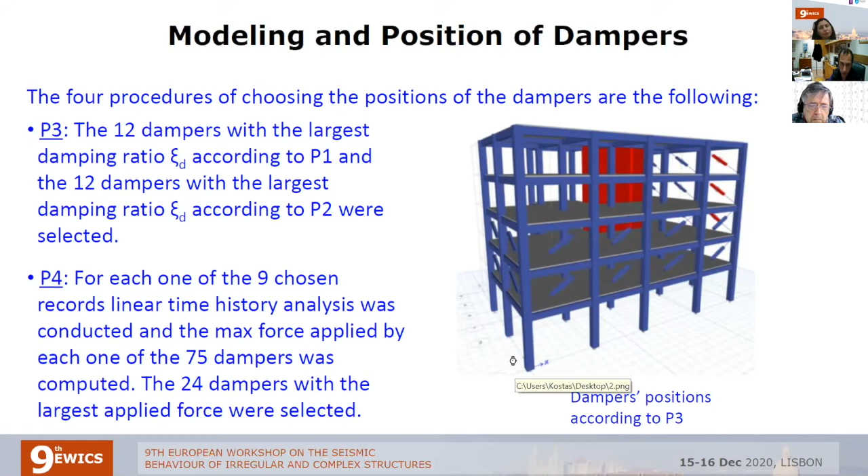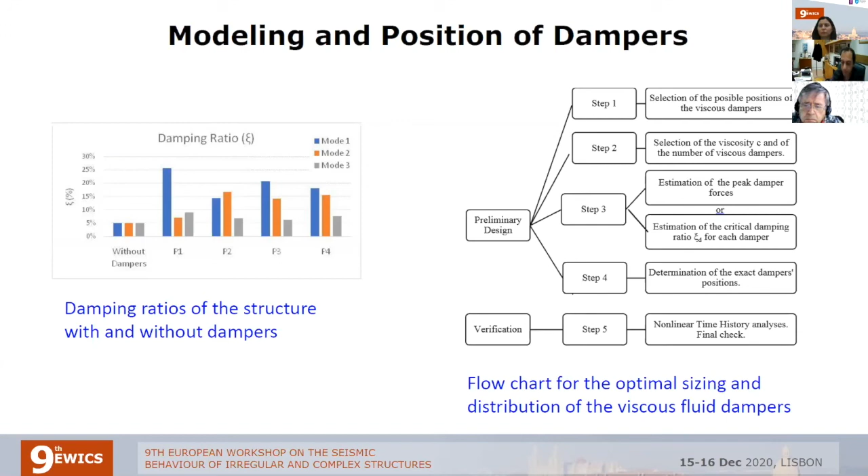As mentioned above, the assessment of the building's seismic performance was carried out using linear and non-linear time history analysis with 9 real strong motion pairs of horizontal bidirectional earthquake strong motions. In order to account for the directionality of the seismic motions, each pair of earthquake records was applied along 2 horizontal orthogonal axes, forming 2 different incident angles, 0 and 90 degrees, with the structural axis of the building.

For each ground motion, the relative displacements, drifts, along axes X and Y, as well as the rotations of the floors, were computed as damage measures. More specifically, for each earthquake record and response measure, the maximum of the values for the 2 incident angles was considered. Then, the average of these values for the 9 records was determined according to the most common seismic code provisions.

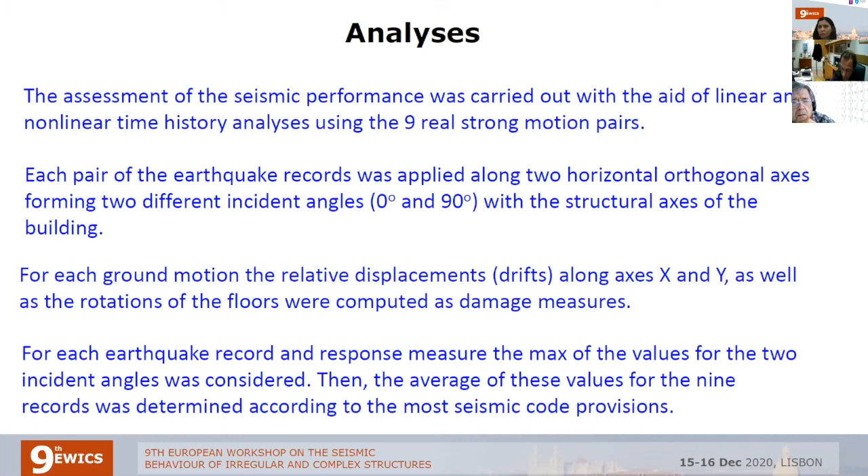The analysis showed that procedure 1 was the least effective in reducing the maximum drift Y compared to the values of the building without the dampers, in case of both the linear and the non-linear analysis.

Regarding the linear analysis, the other three procedures, 2, 3, and 4, led to very similar results, reducing the drift along the y-axis up to 30%, whereas in case of the non-linear analysis, procedure 4 seems to be the most effective for the majority of the stories, up to 67% reduction, followed by procedures 2 and 3.

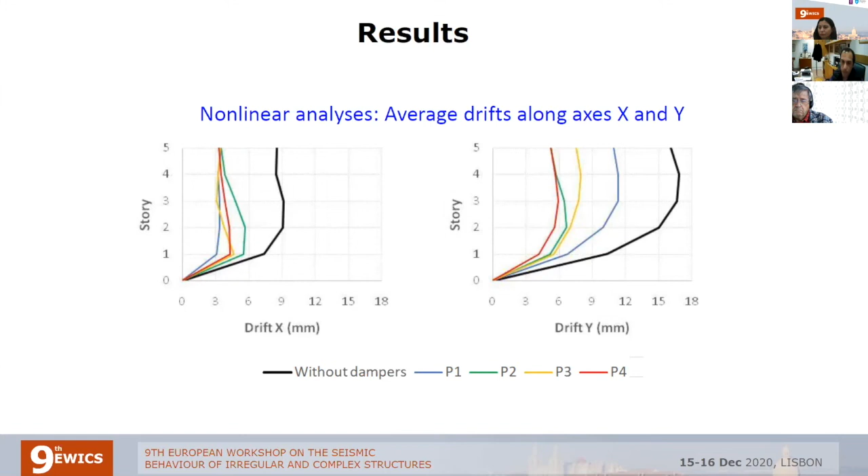Now, with regard to the floor rotations, the results of the analysis revealed that procedure 1 was the most effective in both cases of linear and non-linear analysis, up to 50% and 75% reduction respectively, compared to the values of the building without the dampers.

Procedure 2 was the one that led to the smallest reduction in rotations. Of significant importance is also the fact that the use of the dampers has been proved to be more efficient in improving the seismic performance of the building in case of the non-linear analysis.

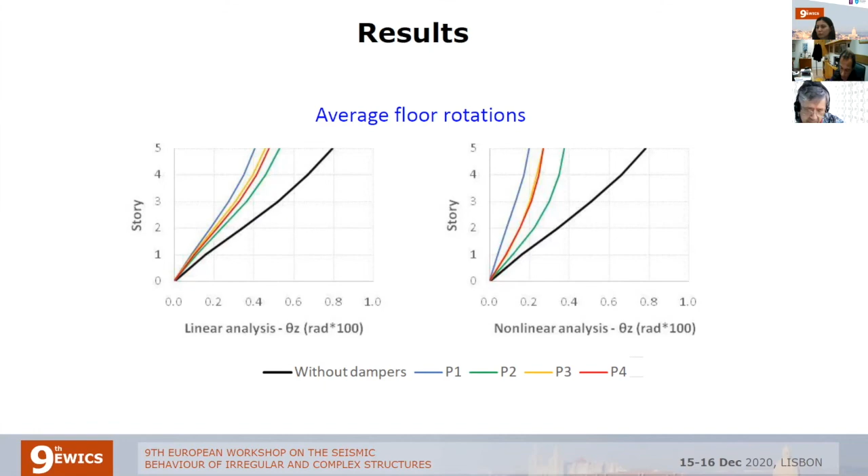Now, based on the results of the study, the following general conclusions can be drawn. The use of viscous fluid dampers significantly reduces both the drift and the floor rotation of buildings with asymmetric plan. In case of these buildings, the distribution of the dampers should also be asymmetric according to the proposed procedures. The use of the dampers is more efficient in improving the seismic performance of asymmetric buildings in case of the non-linear analysis.

The efficiency of the procedures depends on the damage measures. Procedures 4 and 1 led to the best results in case of drifts and floor rotations respectively. A flowchart for the optimum placement of the viscous fluid dampers in case of any asymmetric building is proposed.

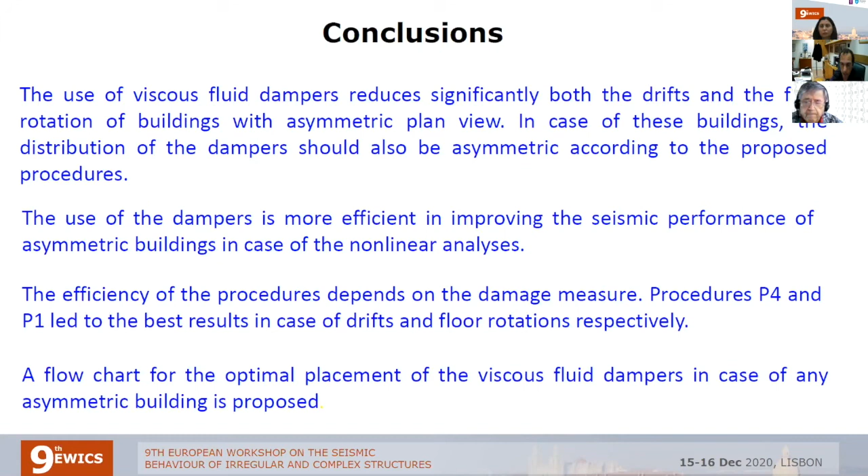Thank you very much for your attention.